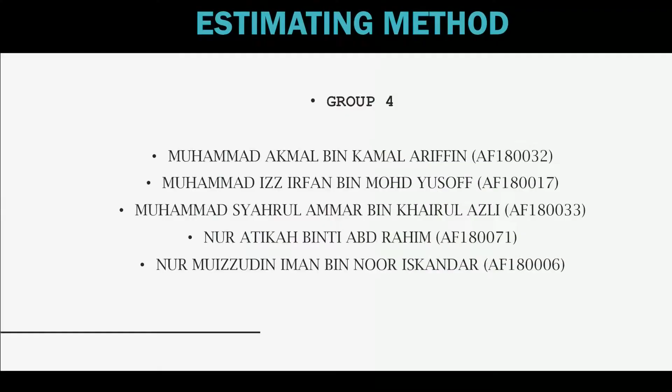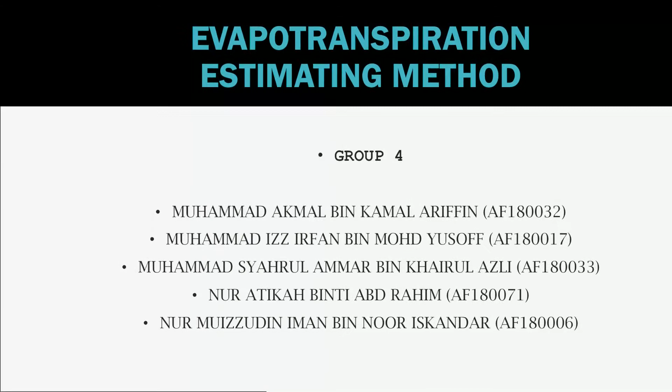We are from Group 4, Section 4. These are our group members: Muhammad Akmal bin Kamal Ariffin, Muhammad Irfan bin Muhammad Yusoff, Muhammad Syahrul bin Khairul Azli, Nur Atikah binti Abd Rahim, and lastly Nur Muizzudin Iman bin Noor Iskandar. And our group project's title is Evapotranspiration Estimating Method.

My name is Nur Atikah binti Abd Rahim and I am going to present our abstract. Evapotranspiration is a process of the hydrological cycle that links land surface water balance and land surface energy balance. It functions in review of evapotranspiration estimation methods in hydrological models. Based on our project, it can be summarized that our objective was achieved.

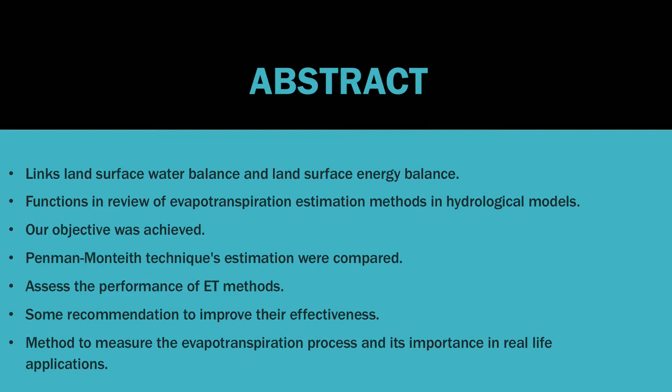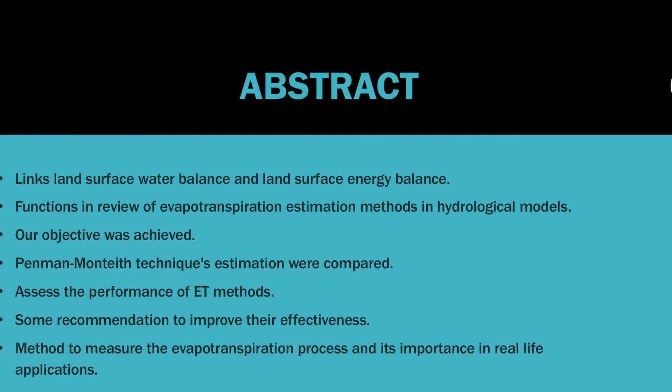Penman-Monteith technique's estimations were compared to determine the accuracy and dependability of their approaches. Three parameters computed to assess the performance of evapotranspiration methods have also been listed. However, some recommendations to improve their effectiveness are needed.

For example, we will need to create an evapotranspiration estimate method that takes into account soil moisture control, vegetation index space, and a soil moisture index derived from the surface temperature. Finally, the method to measure the evapotranspiration process and its importance in real-life applications can be listed out by our project. Thank you.

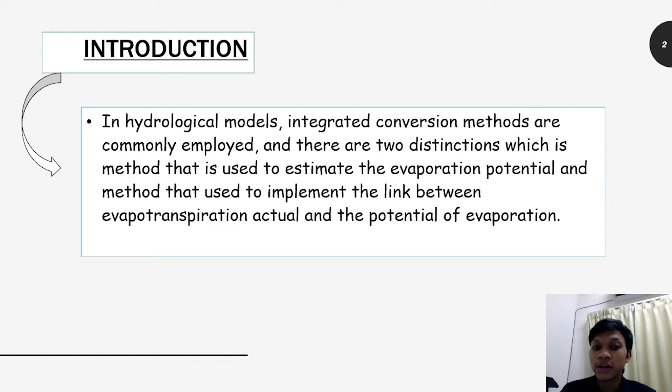Assalamualaikum, my name is Muhammad Irfan bin Muhammad Yusoff. I'm going to explain the introduction and comprehensive review of our project. In hydrological models, integrated conversion methods are commonly employed, and there are two distinctions: methods used to estimate the evaporation potential, and methods used to implement the link between actual evapotranspiration and the potential evaporation.

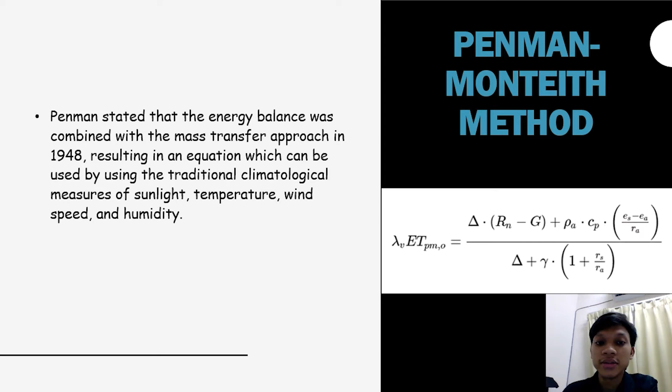The first method that we use is the Penman-Monteith method, which combined the energy balance with the mass transfer approach in 1948, resulting in an equation which can be used with the traditional climatological measures of sunlight, temperature, wind speed, and humidity.

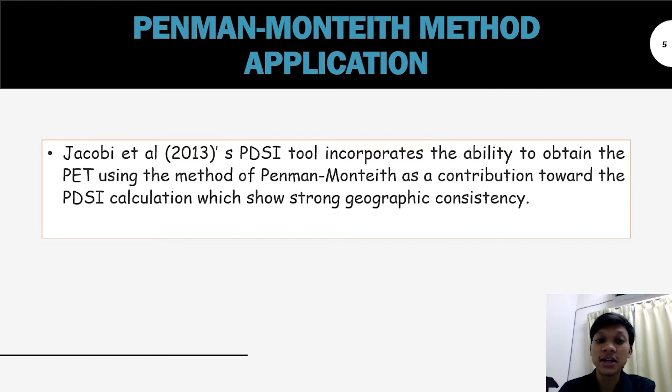In 2013, Jacobi et al.'s PDSI tool incorporated the ability to obtain the PET using the Penman-Monteith method as a contribution toward the PDSI calculation, which shows strong geographic consistency.

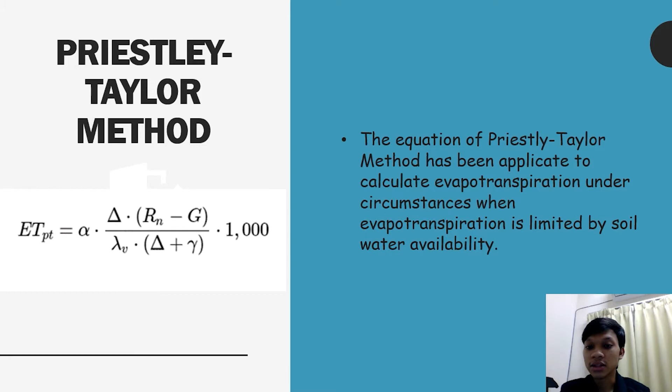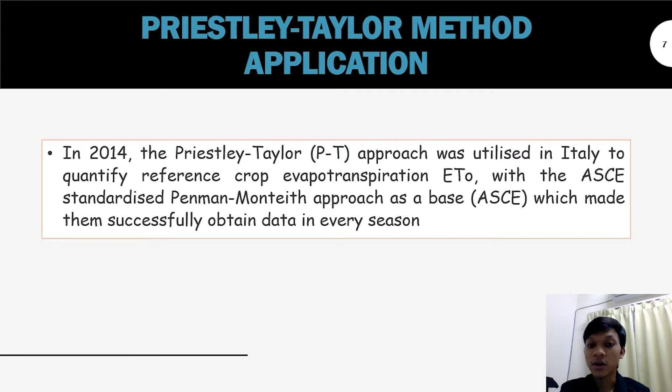The second method is the Priestley-Taylor method. The equation has been applied to calculate evapotranspiration under circumstances when evapotranspiration is limited by soil water availability. As an application, in 2014 it was utilized in Italy to quantify reference crop evapotranspiration with the ASCE standardized Penman-Monteith approach as a base, which made them successfully obtain data in every season.

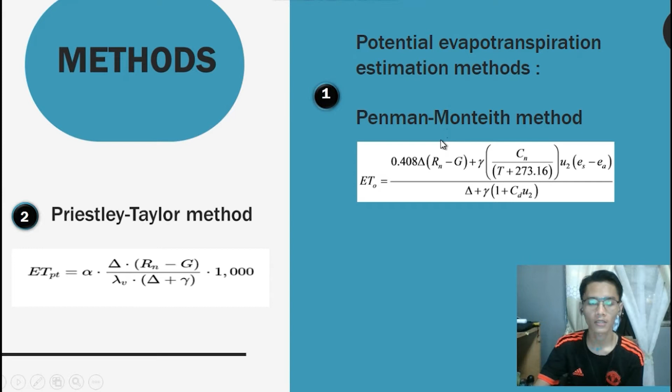Assalamualaikum warahmatullahi wabarakatuh. Okay, this part is a comprehensive review. The method that we use in this project is potential evapotranspiration estimation. The first is the Penman-Monteith method and the second is the Priestley-Taylor method. This is the formula for the Penman-Monteith method, and the second is the formula for the Priestley-Taylor method.

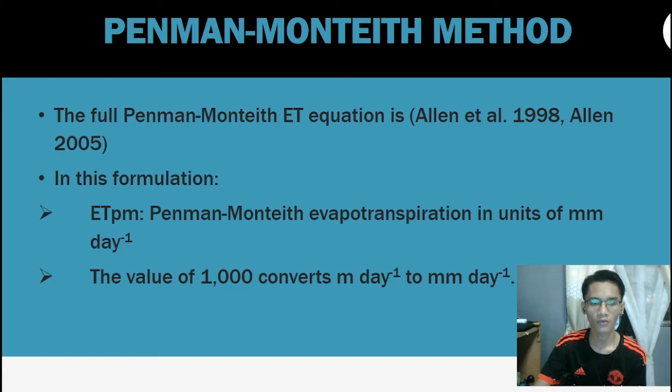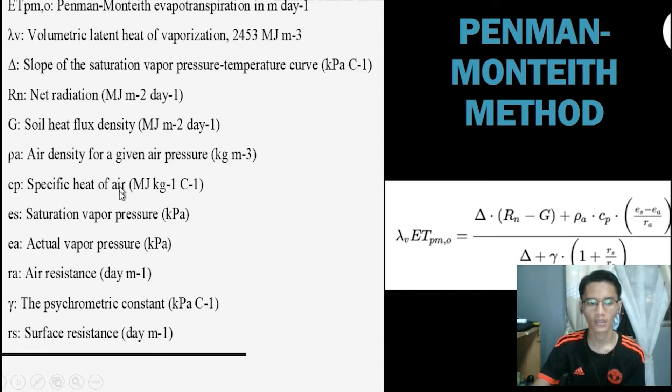For the Penman-Monteith method, the full Penman-Monteith equation is from Allen 1998, and in this formulation ET_PM is the Penman-Monteith evapotranspiration in units of mm/day, and the value of 1000 converts m/day to mm/day. This is the formula, and these are the names of the terms in the formula that we use for this method.

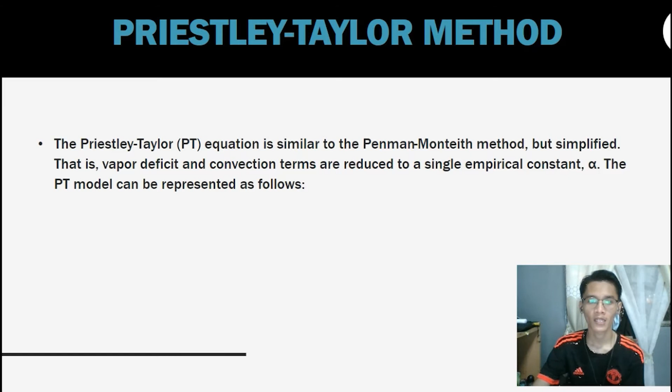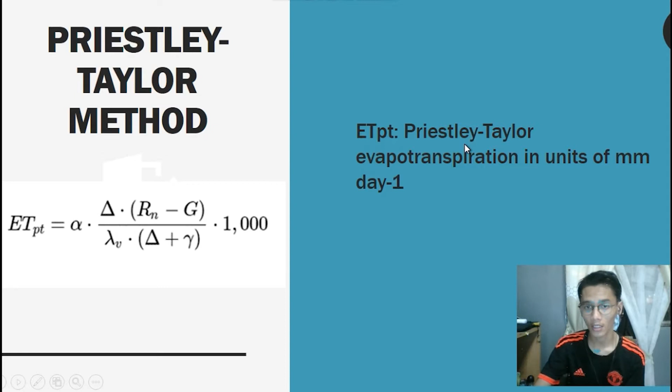The second is the Priestley-Taylor method. This is similar to the Penman-Monteith method but simplified. That is, the vapor deficit and convection terms are reduced to a single empirical constant. The PT model can be represented as follows. For the Priestley-Taylor method, this is the formula, and ET_PT is the Priestley-Taylor evapotranspiration in units of mm per day.

This is a comparison of potential evapotranspiration estimation methods. This is the graph, which measures the accuracy and the reliability of each method. ET estimates by each method were compared with the estimation of the Penman-Monteith method. Performance of each method was measured by computing three parameters.

First is absolute error, which gives the amount of physical error in the measurement. Second is relative error, which gives an indication of how good the measurement was relative to the size of the thing being measured.

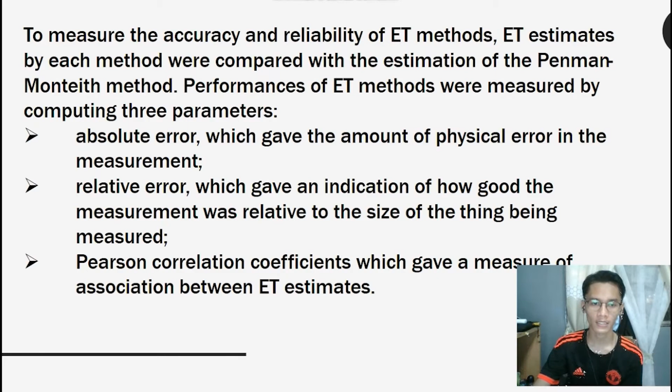And the last is Pearson correlation coefficient, which gave a measure of association between ET estimates.

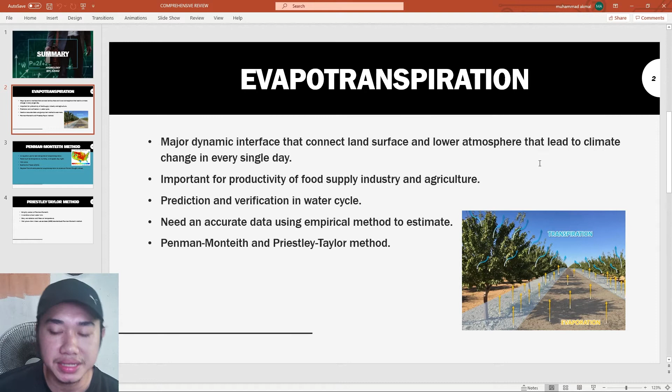The Penman-Monteith method is basically an equation used for estimating the rate of evapotranspiration itself. A couple of factors that need to be known are temperature, humidity, wind speed, day and night. Also, it's well proven, and we can take the example of the bushland of Texas, alfalfa, where at the moment they were having an extremely advective period where hot and dry air was imported into the region from large scale weather patterns during drought, and very high water use rates were accurately predicted by various equations including Penman-Monteith.

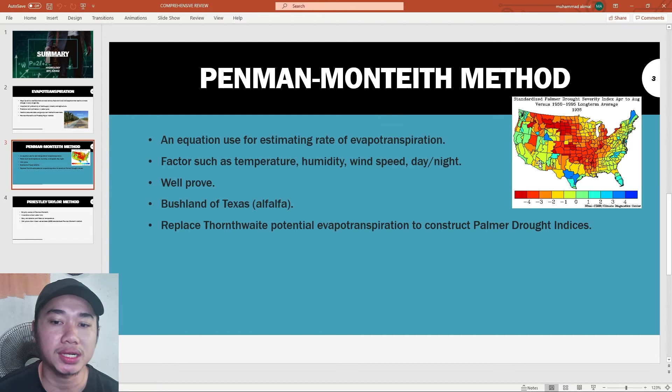So in terms of application, it replaced potential evapotranspiration to construct Palmer drought indices. The Priestley-Taylor method is a simplified version of Penman-Monteith, but in conditions of soil water limit. The only factors or parameters needed are daily net radiation and mean air temperature. Also, it is well proven when it has been used as a base for the ASCE standardized Penman-Monteith method.

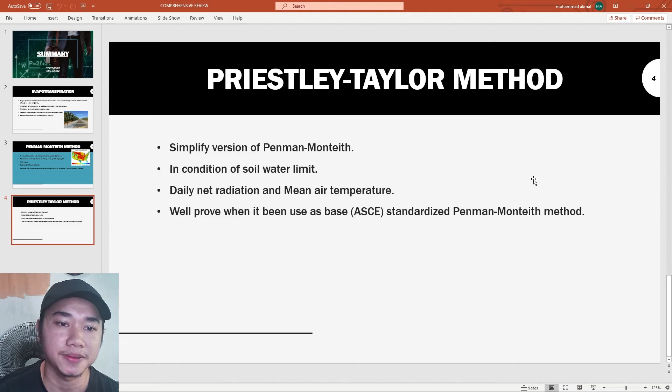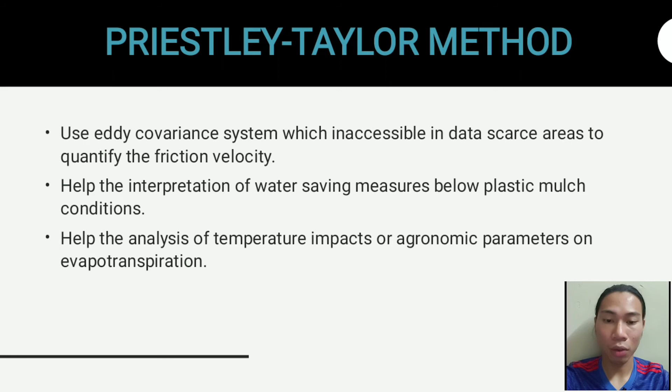This is the recommendation of this project. For the Penman-Monteith method, create an evapotranspiration estimate method that takes into account soil moisture control, vegetation index space and a soil moisture index derived from the surface temperature. So the Penman-Monteith soil moisture index algorithm greatly improved daily evapotranspiration. For the Priestley-Taylor method, use an eddy covariance system, which is inaccessible in data scarce areas, to quantify the friction velocity. It will help the interpretation of water saving measures under plastic mulch conditions.

For the conclusion, the Penman-Monteith method is used to determine evaporation from grass, open water and bare soils, also known as evapotranspiration, based on the combination of energy balance and aerodynamic formula. The Priestley-Taylor method is a simplification of the Penman-Monteith method used to allow evapotranspiration calculation under conditions where the soil water supply limits evapotranspiration. Differences between both methods were higher in low rainfall climate divisions.

So now, let's continue with the Q&A session.

The correct estimation of evapotranspiration in the water balance equation allows for improved water management in rice cultivation. 8 evapotranspiration estimation methods were tested with 30 years of daily data at a study site on the west coast of Peninsular Malaysia. Penman-Monteith and Priestley-Taylor were among them. The estimation of evapotranspiration by all methods showed the same trend throughout the year. The Priestley-Taylor method gave the second highest estimation, while the Penman-Monteith method gave the lowest estimations. That's all.

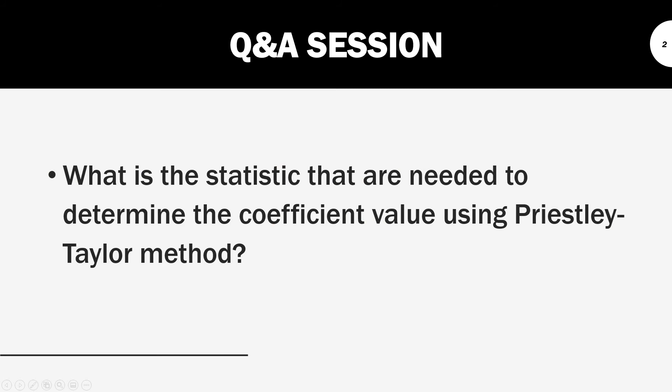The answer to the question given is soil heat flux, average air temperature, net radiation and soil water content. That's all. Thank you.

The methods that we have used for potential evapotranspiration estimation are the Penman-Monteith method, and the second is the Priestley-Taylor method. The Priestley-Taylor equation is similar to the Penman-Monteith method but simplified. That is, vapor deficit and convection terms are reduced to a single empirical constant. The PT model can be represented as follows. As ETPT, which is Priestley-Taylor evapotranspiration in units of mm per day.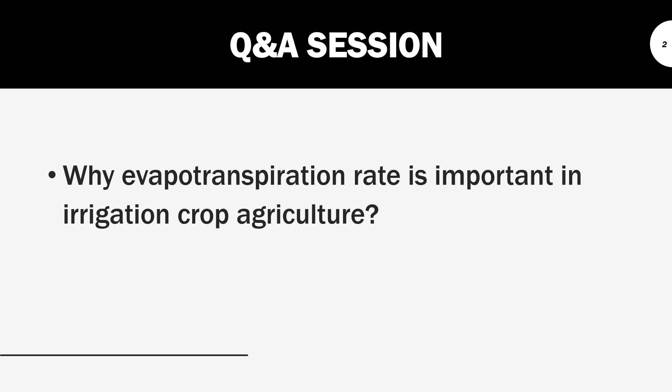Getting the evapotranspiration rate is important when it comes to crop agriculture because with available programs and data, crops get enough water during their various growth stages. Also, it conserves and prevents excessive water usage as farmers already know what they require for a period of time. Thank you.

For the question, the other benefit of the recommendation for the Priestley-Taylor method is it will help the analysis of temperature impacts or agronomic parameters on evapotranspiration. That's all. Thank you.